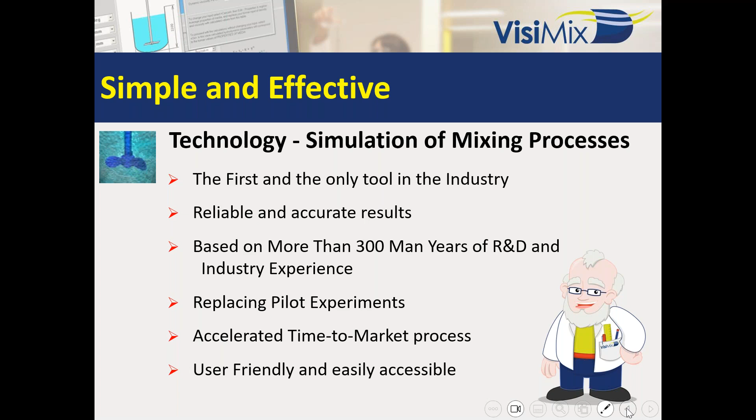After that, they came to Israel, and we transferred all of this knowledge into software, providing all over the world the capability to understand, in a very fast way, how we can provide what the process requires at different levels. So to summarize this part, this very fast introduction.

VisiMix is based on physical models supported by empirical data. We solve the momentum balance to know the velocity of the flow in a realistic way. We characterize every momentum component of the momentum balance equation, and we were able to consider experimental data and change the models and coefficients according to the specific geometry of the vessel.

We were able to provide not only the velocity of the flow, but also the gas holdup, the mass transfer coefficient, the drop size, and in other fields, the concentration of any material, or the solid distribution and more. So this is the brief summary.

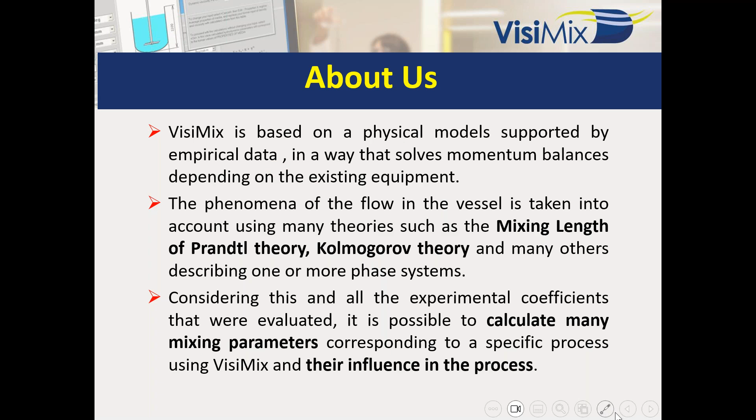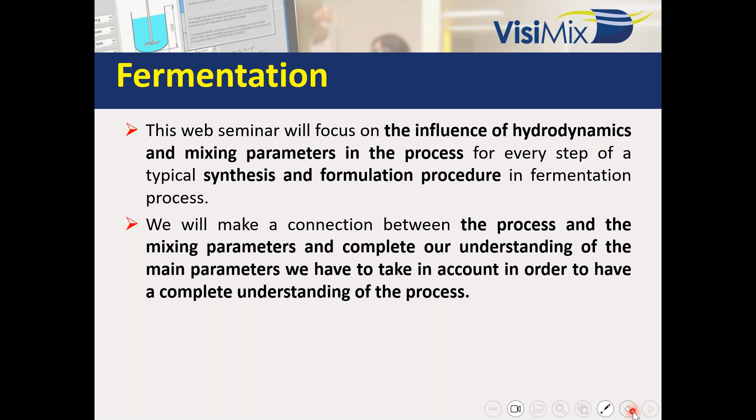So in the process description, and how fermentation connects with the process, we'll talk a few minutes about what fermentation is in the biotechnology industry, and how we are able to provide the conditions for this fermentation, coming from miscible liquid distribution, because we need to provide nutrients and pH in conditions where this microorganism will be able to grow.

We'll talk about, of course, the oxygen transfer from gas phase to liquid phase. This is the main point that we are normally asked about during our first connection with a biotechnology company. And we'll touch on some points that professional people are aware of: how the microorganism will reproduce itself in equipment that has shear rate, and maybe this shear rate can damage the microorganism.

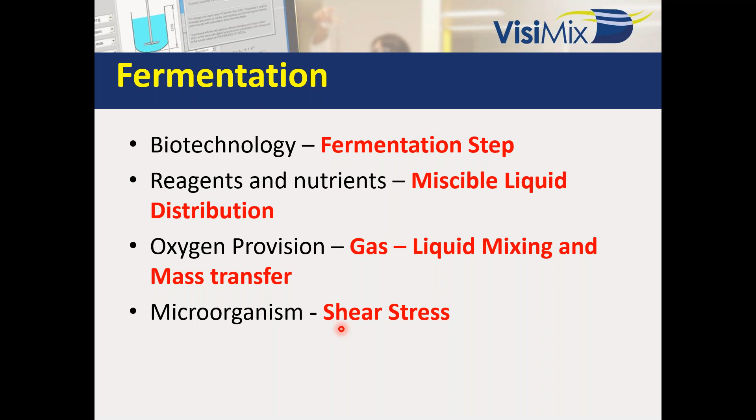We'll touch on it. Of course, this is more a biological question than shear rate. The shear rate, of course, we're able to calculate. We'll explain a little more about it. And of course, after that, we'll open the software and show you how it's working. So in biotechnology, the fermentation step is really the first step.

And after we finish this, we need to do other activities that, of course, the company business can support: how to recover the material, how to purify it, and how to generate our final results. We will discuss today the upstream. This is the normal name. Upstream is for the fermentation, downstream is for the harvest, purification, filtration, and maybe chromatography. So we can help on both. Now we'll focus ourselves on the fermentation.

Fermentation is a metabolic process that produces chemical change in organic substances through the action of enzymes. And in food production, it may more broadly refer to any process in which the activities of microorganisms bring about a desirable change to a foodstuff or beverage.

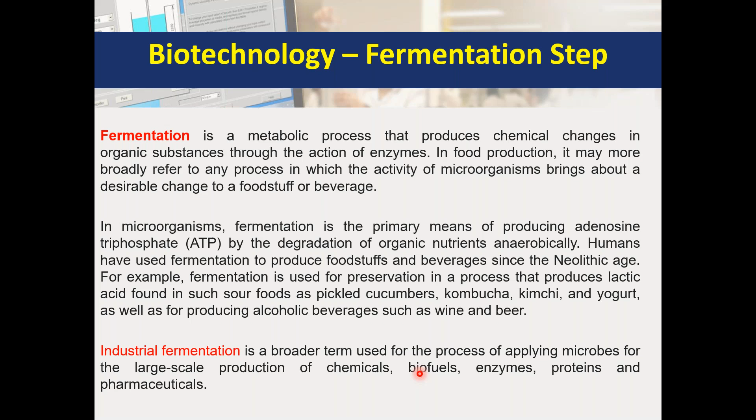So the first step is to understand what fermentation is, and in the industry, we need to organize all, and all the materials that we're using should be utilized well. As you know well, only to remind you, when we talk about microbial growth, we talk about nutrients; microbial cells will give cell growth, energy, and reaction products. This is what we're looking for.

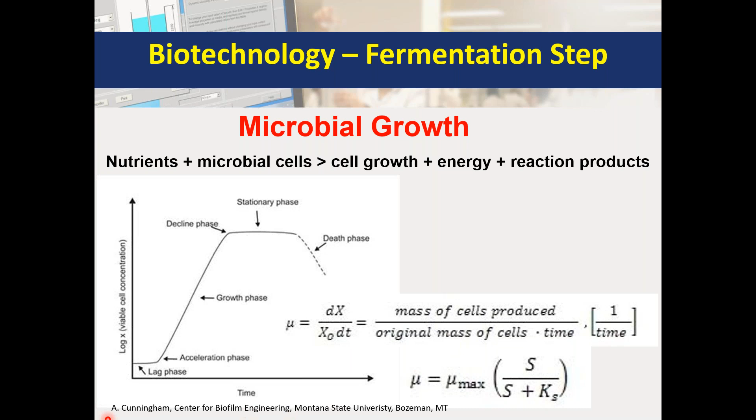Regarding reagents and nutrients, I want only to show you some very fast points. It is like we have a fast reaction. We need to distribute this material in the tank, and we need to be sure that during the growth of this quantity of cells in the tank, we're able to transfer material. I want to show you a very simple way how the material can be dispersed in the tank according to the consumption of this material.

And let's think that we are feeding some nutrient. In our case, let's say we have present there some group of salts. It's like the microorganism we have there, and I feed some liquid material. In this case, it will be HCl. If I'm spreading this material well, and the microorganisms are using this HCl, they will consume it well, and we will not see any change in color.

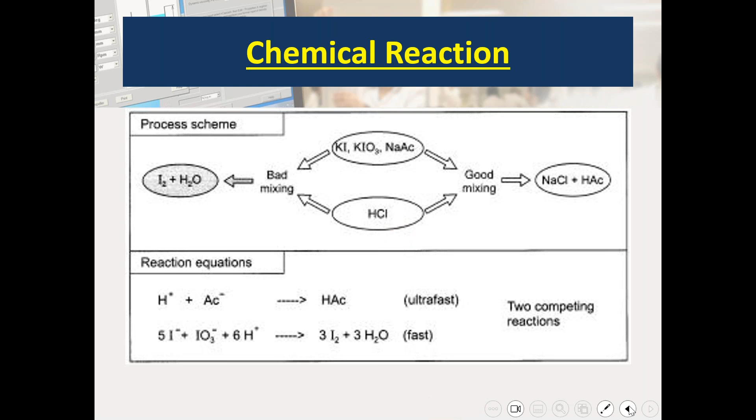But if we are feeding more than required or less than required, what will happen? We will have some deviation in the concentration in the tank. And we have more videos here; I will only present 2 main videos. What happens when we don't have mixing in our tank?

And you see what happens when we don't have mixing. The feeding at every place will be a localized one. Okay, you see it's local. This color is local, and we are not spreading this material well all the time. So cells that are in different places will not be able to enjoy this material.

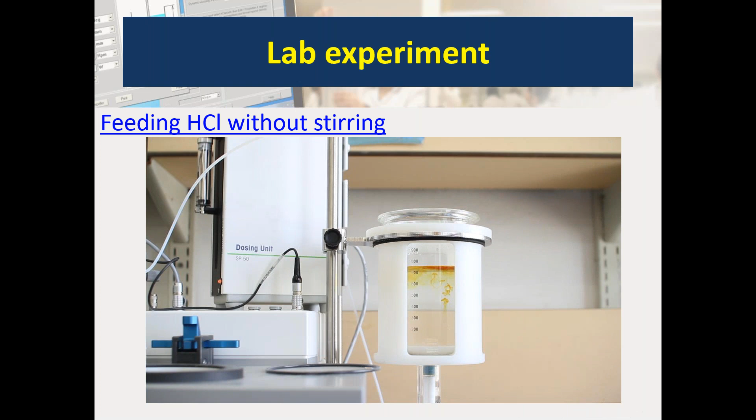If we change the conditions dramatically, and now we use a very fast feeding here in this pipe, fast feeding with high velocity, close to the impeller, close to the high velocity of the stirrer here, you will see that we will not have any color. And in between, anything can happen. For instance, in the middle of the way, we have some plume; close to the impeller at low velocity, we have some color, but it will be well distributed in the tank.

And all of this we need to take into consideration, because normally what we are doing is some tuning of the conditions in the tank by providing some glucose, some material for pH and more. And we need to take care about where we feed in order to spread the material in a good way and distribute it in all the tank. And we have 2 extremes.

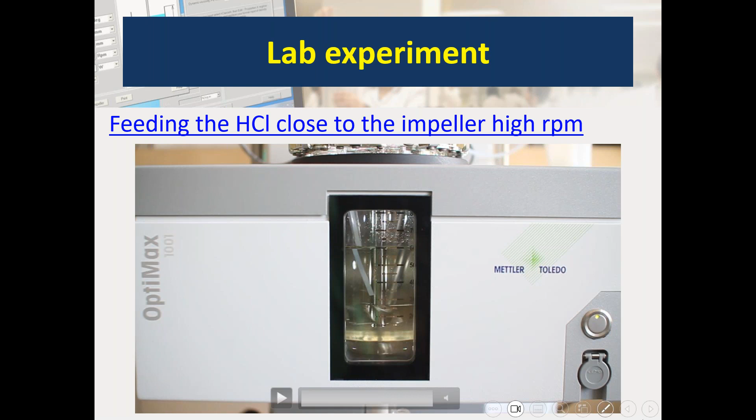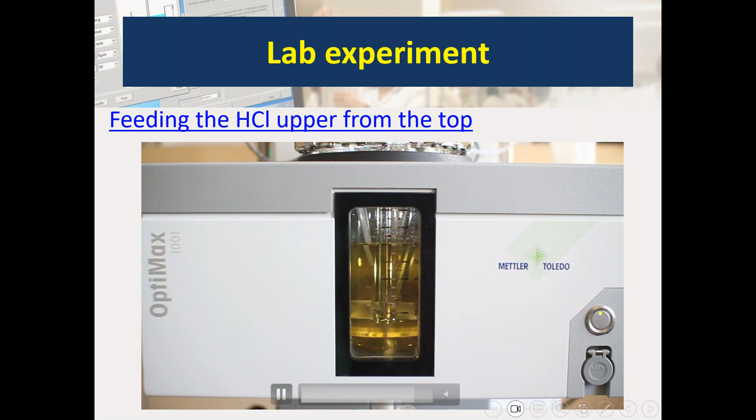And it happens in the tank that even if, for instance, I go to a low velocity, and from the top of the tank, you see here, what will happen is that around this point where we feed, in a few seconds, you will see a plume of material entering. It's happening now. You see some color entering inside. And it is a problem, because when we have this kind of situation, we are creating completely different conditions in the tank, and our microorganism will not feel the same in another place. So we need to take it into consideration.

Now we reach gas-liquid mixing and mass transfer. This is the main question that comes to our desk when we start to discuss with your kind of companies, biotechnology. And here we need to take into consideration that we are discussing a very typical mass transfer. The mass transfer of material in our case will be the oxygen. The oxygen mass transfer, KLA, that we are looking for happens because we have some driving force, that is the difference between the maximum concentration, the solubility of the oxygen in the liquid phase, the saturation, minus the concentration we have inside our tank.

As you can imagine, when we are growing the quantity of cells, the concentration in the liquid will go down because we have more material and we are transferring at the same rate. The meaning of this is we will require more oxygen in order for every one of the cells to be able to use this oxygen and grow. So we are talking about very simple mass transfer. We will be able to calculate the KLA. We're able to know what will be the maximum rate, this dC/dt, the maximum mass transfer to the liquid phase, and we will be able to connect it with the physical properties.

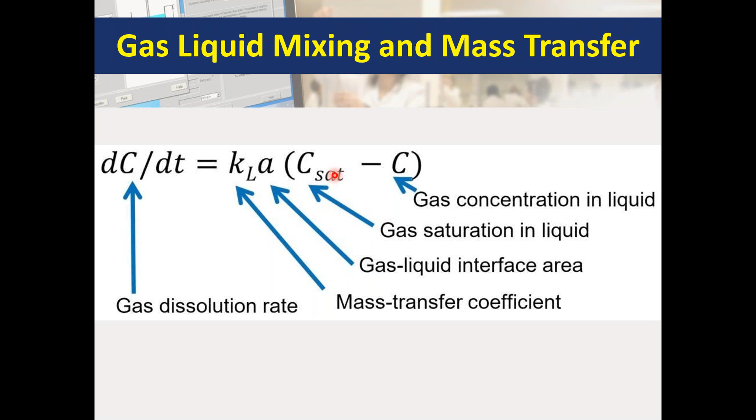So we are feeding some material. We need to transfer this oxygen from the headspace or from the bottom of the tank to the reactor, okay? And after that, we need to transfer this oxygen into the liquid phase. So this is the primary, this is the liquid phase, this is the gas phase, and the secondary is drops that may be the materials, the microorganism and more, or the nutrients that we feed inside.

We have three main distributions of gas. This one, A, is not well distributed, and more than not well distributed, some kind of flooding, the material entering and exiting. Okay, so we are not using the equipment in order to transfer the gas. We have some not good distribution, but in some way that we will be able to calculate for you. And we have a well and good distribution of material. We need to find a way to be in between these two stages and try not to be here, because if we are in the A situation, the meaning of this is that we're not able to do it. All of this the software will provide to you by notification, and after that by numbers and calculations.

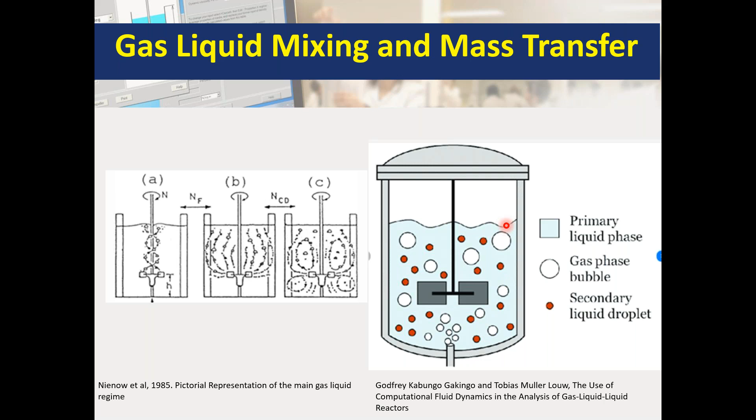For instance, the quantity of gas we will have in the liquid media, if you have some gaseous drinking, you will see the drops. So we'll be able to calculate the quantity of drops and the capability of the area that we're generating with these drops to transfer the gas to the liquid phase.

So this is the way it works. Once we have the drops, we're able to transfer the gas to the liquid phase, and we have some mechanism that happens here, taking into consideration that our drop maybe is going down. We have a distribution of drops, and we need to consider all of it in place and on average in order to progress.

So it is our gas drop and how it's transferring the concentration of the oxygen that we have in the middle of the gas to some film that happens inside the gas, going to the phase surface, and after that how this material is coming to a liquid phase and disappears or not according to the capability of the microorganism to get this oxygen and to progress.

These lines that are coming from the surface to the liquid phase and available to the microorganism can change dramatically in different parts of the process, and we need to be aware in order to adjust ourselves and to know what is the capability. Maybe we have more organisms than the oxygen we're providing, so we will come to the end of the capabilities to grow and start to die.

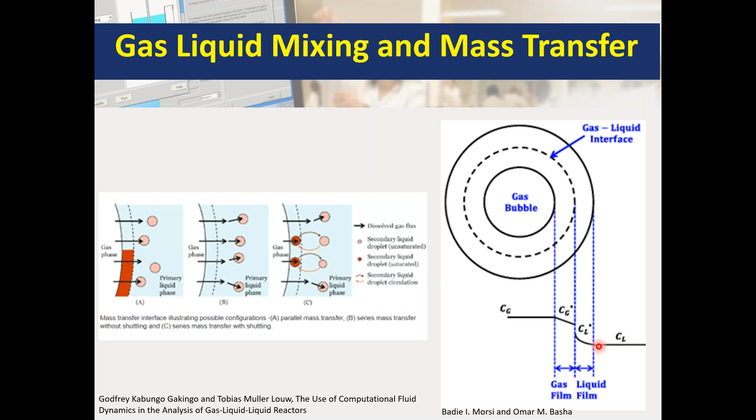So we need to have a way to understand what is the maximum, to take into consideration needs as part of the process. So this is what we explained before, in a big picture. You see the concentration of oxygen, some mass transfer to the wall, to the interface, and after that we're going down depending on the consumption of this oxygen, coming to some concentration in the liquid bulk, or in the liquid film it will go down to zero. The meaning of this, we have another way to take in advance. Okay, this is the point.

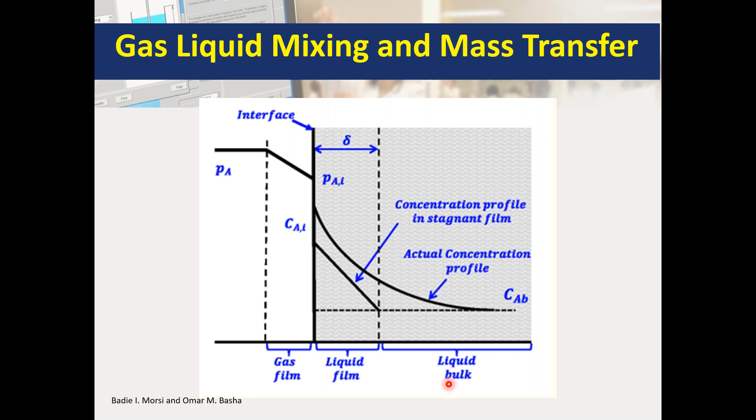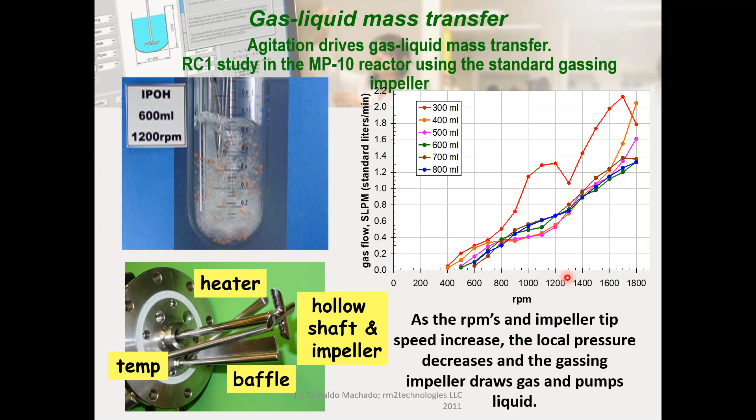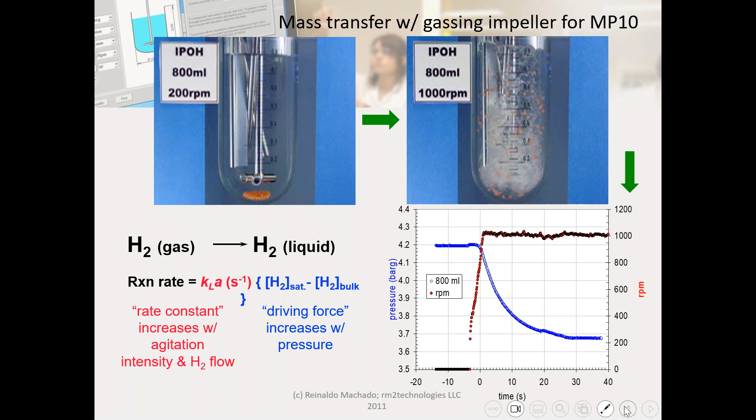This is the process. I invite you to enter the website. We have presentations. There is this presentation from Dr. Reinaldo Machado from RM2 Technologies, where he explained well how to characterize based on the measurement of the gas flow and the sensitivity to the RPM. He explained how we take into consideration, in this case hydrogen, but it can be oxygen, the measurements during the time, how we drop the pressure or consume with some sensor of dissolved oxygen in the tank, and how to calculate the KLA.

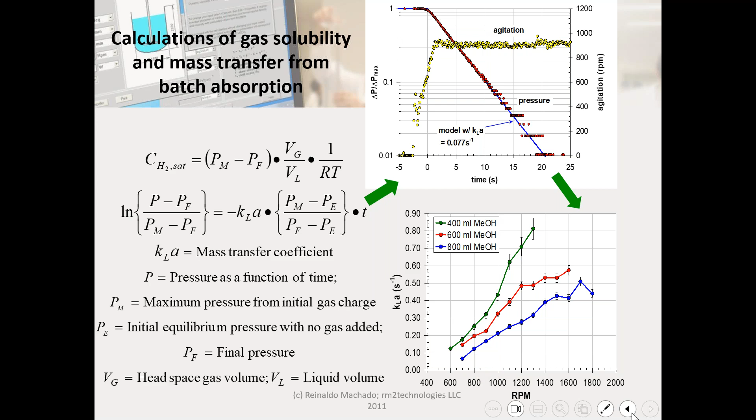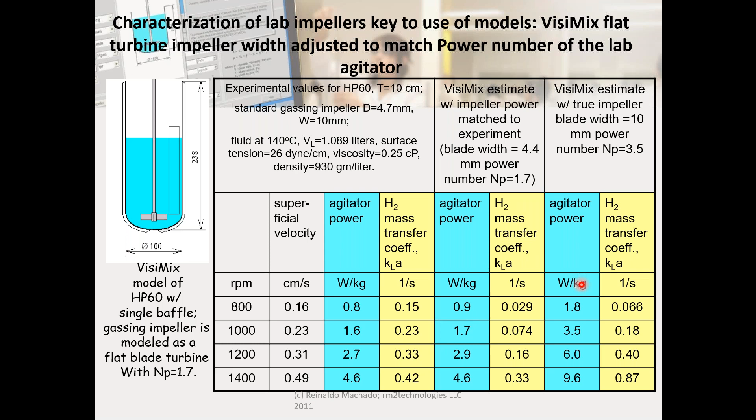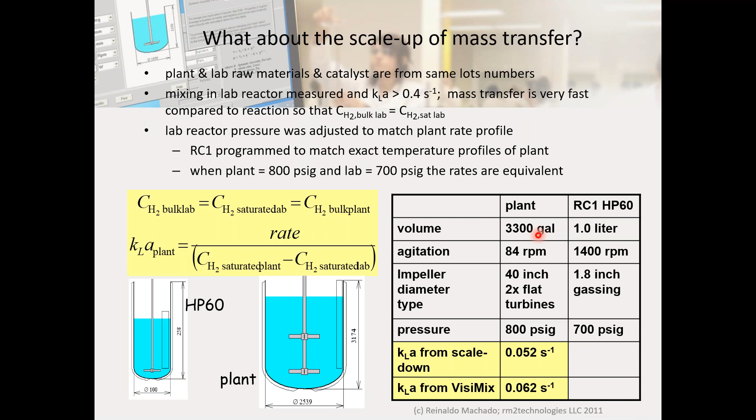It was done manually, and after that, we used the software in order to compare the experimental results with the VisiMix results, and based on it, because we have a very good model, we were able to progress and calculate the expected mass transfer coefficient in the next step. And to summarize, in this case they went to big equipment, from 1 liter to 3,300 gallons, with no problem. Okay, this is the main idea.

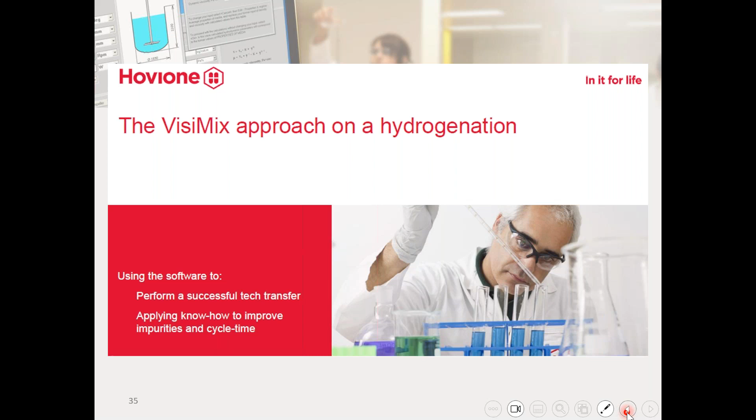Another interesting example, not from the point of view of characterization like Dr. Machado showed in his presentation, is a case study that came from the company Hovione, and they show us a different point of view. They were in the industry working in hydrogenation too, because these are mainly the histories we have that we can share. They show us how they went from this equipment to 6,000, and they did all the job exactly as we advise: go to the main important parameters, calculate the shear rate that is available, the drop size, and more.

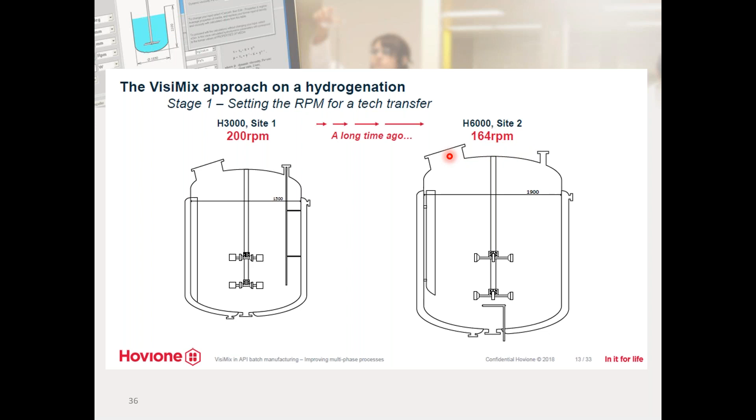And they wanted to reproduce, because they had another equipment in production, they continued to work and wanted to know what was the RPM. So they started with this equipment, H3000, at 200 RPM. They succeeded to go to the equipment H6000 with 164 RPM. A long time ago, with the software, they calculated the hydrodynamic parameters that are controlling the gas transfer. And after that, they continued to the equipment H5000, and they wanted to calculate the RPM.

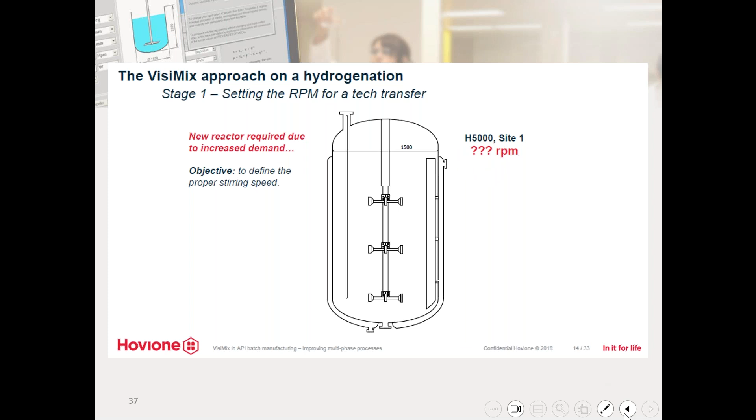The normal way to work, because they had data for it, is to understand that the energy of dissipation is a very important parameter to keep fixed in the gas-liquid media, because it is really generating the capability to diffuse the material to the liquid phase. And they found the conditions that will give them a similar maximum energy of dissipation, the parameter that is controlling the mass transfer from the gas to the liquid. So this solution works very well.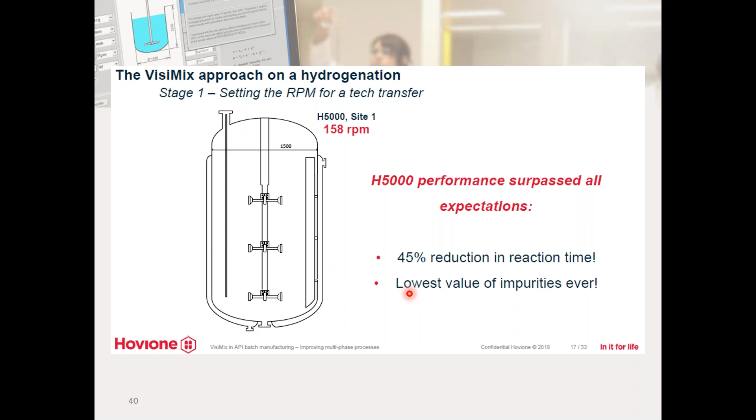But these people, who were very smart, wanted to know why. Because even if it's so good, it's not expected, and we need to solve it. We need to understand it. It's not expected, something we didn't take into consideration. So they did this job.

And when they calculated the parameters that for you will be very, very important, because we talk about microorganisms, the bubble size, the gas holdup, and the mass transfer area or coefficient, they found that it's completely different. You can see in the first two equipment we talk about very low numbers here. And when we went to the new equipment, we are very good. Here is the point. Now, why? The answer was very simple.

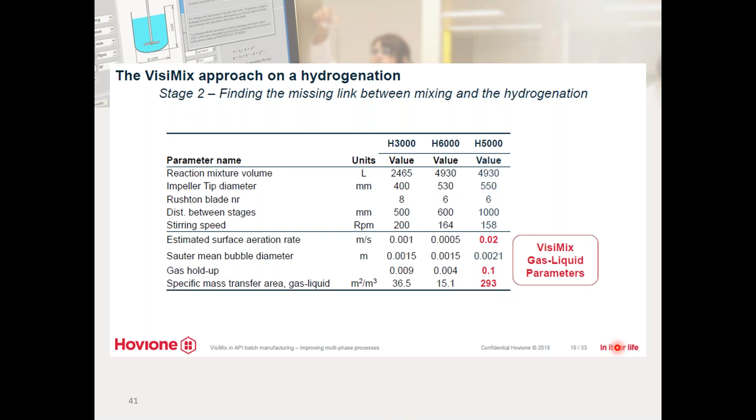Once you have another impeller, you are multiplying the steps that the gas will be inside the tank. And this gives a very high kLa, only using the third stage. It multiplies by 2 the capability to transfer the gas. So very important for your considerations. The gas transfer to the liquid will increase dramatically with some engineering. So I showed you the scientific point of view, and now the industrial point of view.

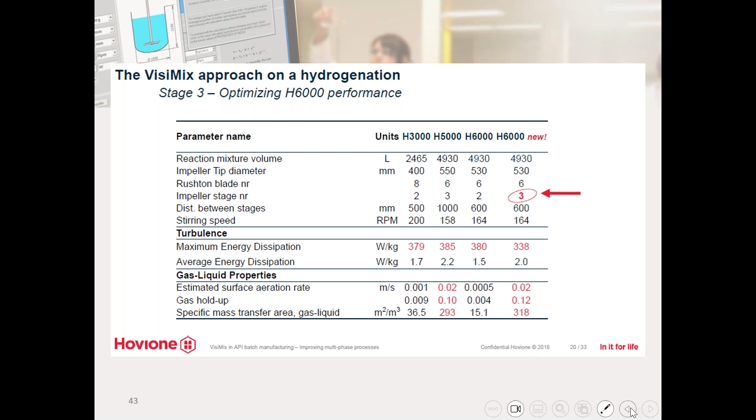And the final story is that they took the older equipment, H6000, added another impeller, and they got better results too. Okay, so this is the complete story from the point of view of the industry. Okay, very well. So the last point about microorganisms.

Here we need to discuss shear stress and shear rate, and the software is calculating it. I'm showing you the considerations we take in the models. The first is that in order to calculate the shear rate, we are taking into consideration the energy dissipation, those parameters I explained before, divided by the viscosity and density, with some power that is coming from the turbulence theories.

This shear rate, from the basic point of view, is coming from the fluctuation of the velocity. And here is the importance of working in the turbulent region. The turbulent region is generating this fluctuation from the average velocity, and it is the real reason that you have local deviations in our tank, and this gradient of velocity is generating a local shear rate. This parameter should not be confused with the average velocity gradient, and normally this parameter governs the mass transfer from the dissolution of solids and from the gas transfer.

And the point here is that this parameter is higher. You can see here, this parameter must not be confused with the average, and its value is typically 1 or 2 orders of magnitude greater than the latter. Okay, so the fluctuations of the velocities are the reason for generating this shear rate, which can damage the microorganism on one hand, but it's increasing dramatically the mass transfer capability.

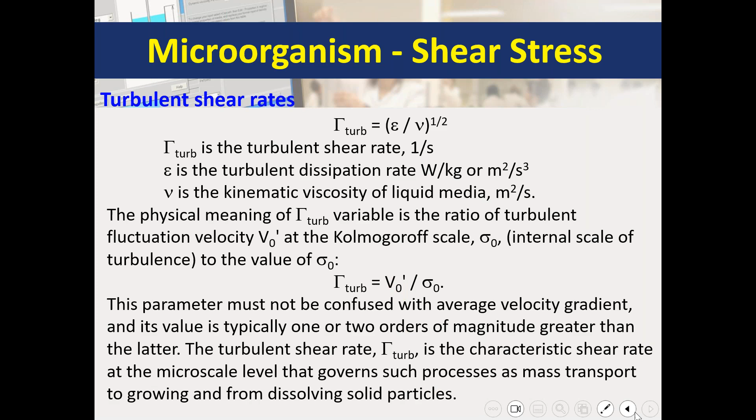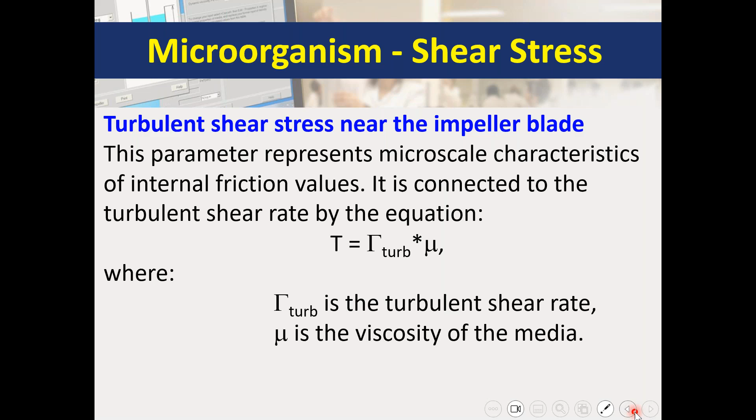So those parameters, I of course took this information from our guidance, and take them into consideration because this is an intensive parameter that you can use even in the lab, when you identify what is the shear rate that is damaging your microorganism. We of course will be able to have this number as a guide for the next step.

As you know well, more than me, we have different kinds of microorganisms that you can use. Some of them are reported to be sensitive to the shear rate. Some of them are less reported for the shear rate. The people working in equipment and mass transfer are less likely to know the mechanism of the process. We need to be aware, and if you tell us that this can be sensitive, we'll take care about the shear rate and not pass the critical shear rate that can damage the microorganism.

Okay, this is all the theory. The last point I want to remind you—because people that know us know this kind of thinking I am providing, explaining all the way—is to try to have some methodology to understand the process. The main idea is to consider that when we are working with our process...

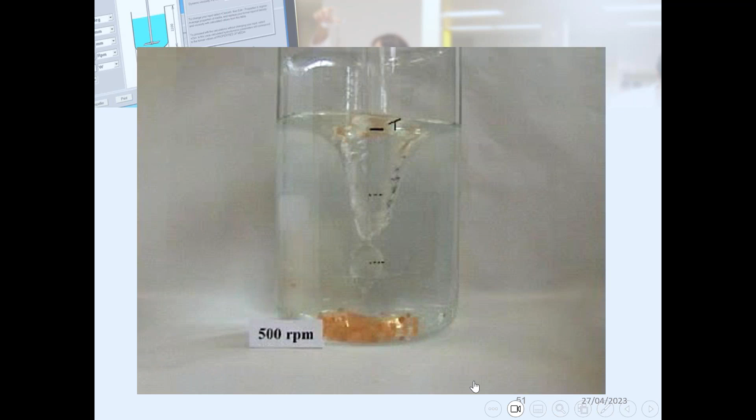We are doing some work in the lab, and we will be able to consider all the parameters I explained before, from a different point of view, in the production step, by using the software and calculating. Once you know what your real capabilities are in the production step or the next step, you will be able to set up equipment at small scale that will be similar in terms of the environment and the mixing you are generating for your process.

Because you bring the mixing from the plant or from the real situation, and you bring your process here at this stage, you are combining them between them, maybe for the first time, and you will be able to understand if the process will run well or not, and how to take care of deviations we will experience here.

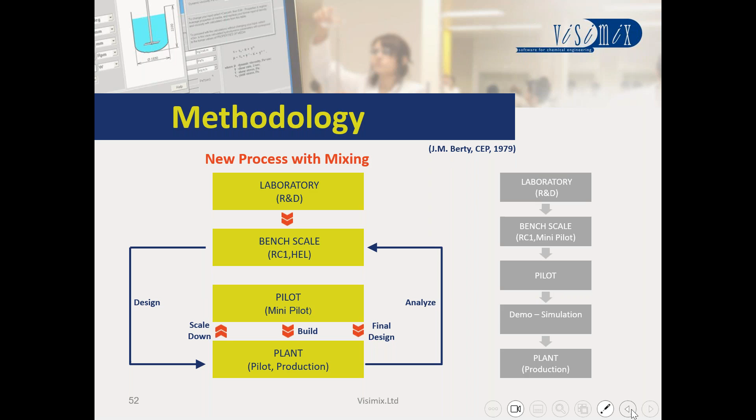When you finish doing it, you will have a final design, and you will have a model explaining how to progress with the software, and with the process. So we have a complete methodology that I will explain to you when you become part of our customer base. We have some publications about it.

In the gas-liquid system, the main important parameters we need to take into consideration are the circulation flow rate, the energy dissipation, the turbulence shear rate—all of which control the gas holdup, the mass transfer area, the drop size, and the mass transfer coefficient.

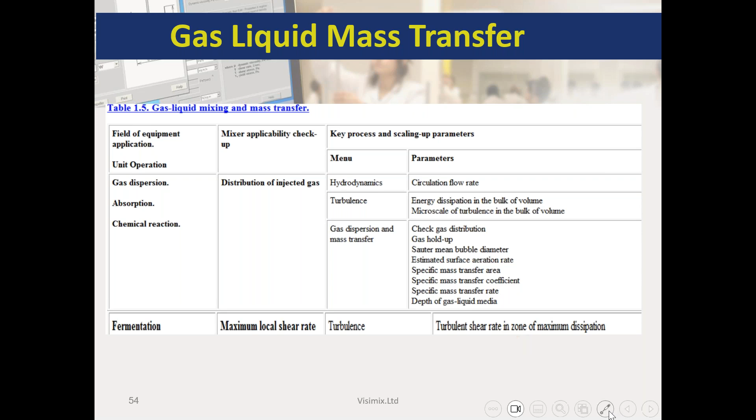This is exactly the way that we need to think. From here, we will open the software and show you how we are able to progress.

We have different products in the company. We'll share this presentation with you, and here you can see the main products that we have. Normally, you will work in turbulent flow.

If you are working in laminar flow, we're able to calculate the shear rate at every step and all, but the efficiency of the transfer will be a little more difficult. If you have more than one impeller on the same shaft, or an impeller that is off-center, we're able to calculate the same.

And if you want to use bubble columns, which can normally happen in this industry, we are able to calculate and to know for the case without an agitator in the tank.

We advise using scale-up, scale-down, and process evaluation to organize your data and guide yourselves on how to scale up while keeping the gas transfer coefficient fixed the same. This will all be inside the software.

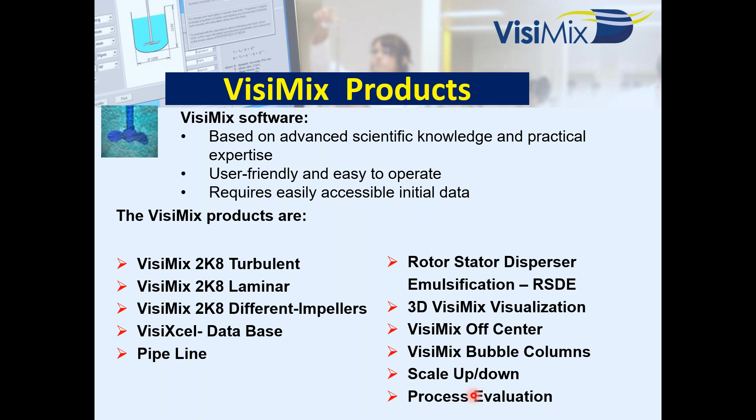At the bottom, you will select gas-liquid, and you will be able to figure out what happens at any other scale. If you have many options, you will be able to put them on one page and think about your technology transfer. All the explanation about the products we have—turbulent, laminar, and more—is there. So take care of it.

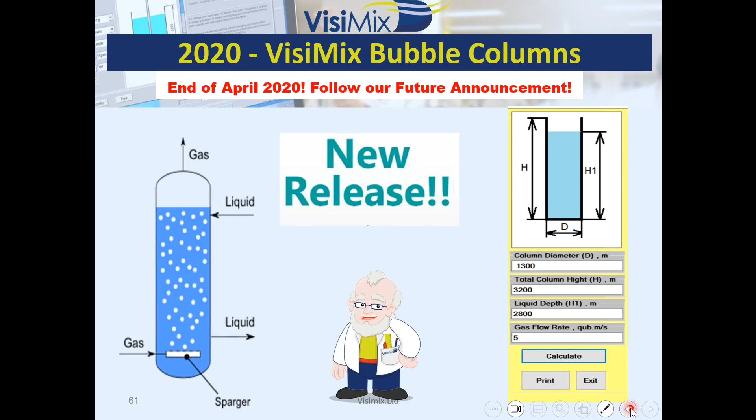You can read more, and of course, you are invited to come to our website, where you will find more information.

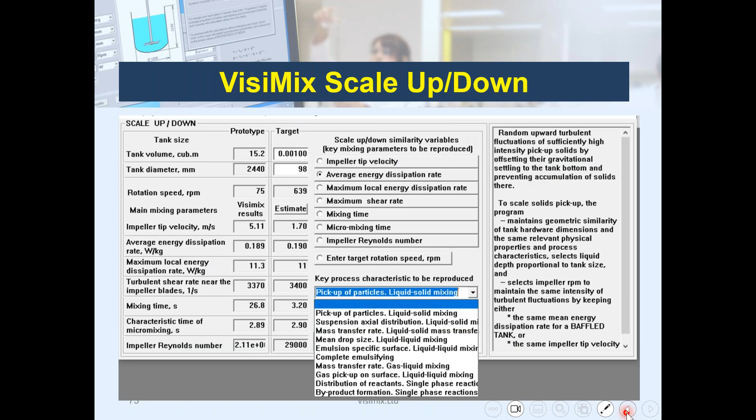I want to finalize the presentation before I start showing you the operation of the software—come to the software and come to the website and see the models and verification examples. Some of our customers share their experience and testimonials.

But I want to emphasize that we're talking about a complete model of mixing in the stirred vessel. It's not only a theoretical solution of mathematical equations, nor is it only some correlations that are normally limited. It's a really deep, experimental study about friction factors that are characterized in different kinds of flow in the tank.

for different equipment. We modify the fluid mixing models in order to include this knowledge into the general momentum equation, to characterize each one of them, and to generate the velocity that will be the base for calculating other parameters. So we're talking about a complete model, not something purely theoretical or purely empirical. This is our added value to the market.

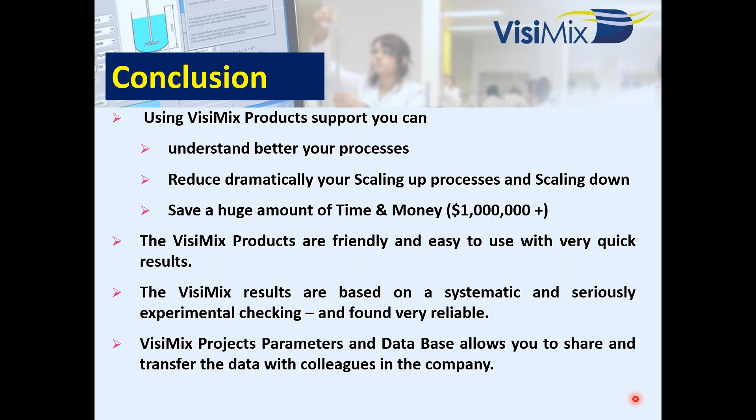Okay, based on this, I will open the software and show you how we are able to calculate all the steps—how we are able to introduce the gas into the liquid media, how we're able to know the drop size, and how we're able to transfer this into the liquid media to transfer oxygen or other material that is miscible or consumed there, and show what the capabilities are in the lab and in the production step.

We have many questions. I will advise to answer you during the meeting. After that, I will cover these questions. Okay, let's progress.

Let's progress now. I will open the software. Software is turbulent, and I will click project new. This is the first step, and I give a name that will be lab fermentation, okay?

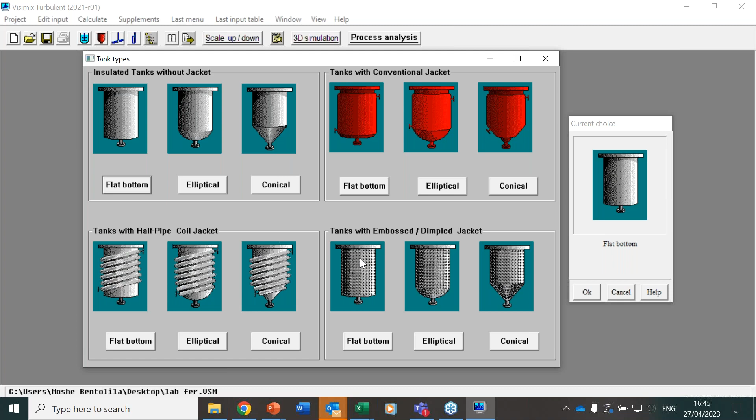And when we click save, the software asks me what is your tank. I will use a typical tank in the lab, it's like this. I will not use heat transfer in this stage because normally it's not the main important operation that will change results.

And when we click OK, the software asks me about the diameter. Let's say that we have a 1 liter equipment, okay, and I'm using about 800 milliliter in my tank. So it's like this. When we click OK, the software asks me about baffles.

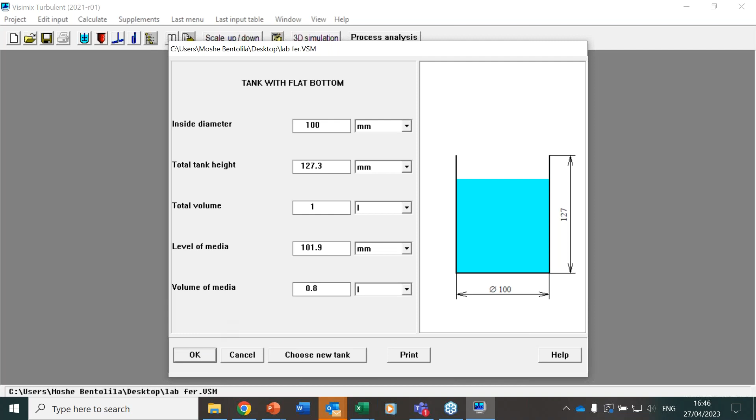Normally in your small fermenter, typical 1 liter equipment that is very available and common in the market, you have baffles like this. You have more sensors, but the baffles are enough because you have 4 normally, and this is fully baffled equipment. And the width of this is normally 10.

The length, if I click big number, will be the maximum one. You have some distance from the bottom. Normally you have very small distance from the bottom. The distance from the wall will be 5, and the angle is 0. So you have like this, 4. This is a typical fermenter you have in the lab.

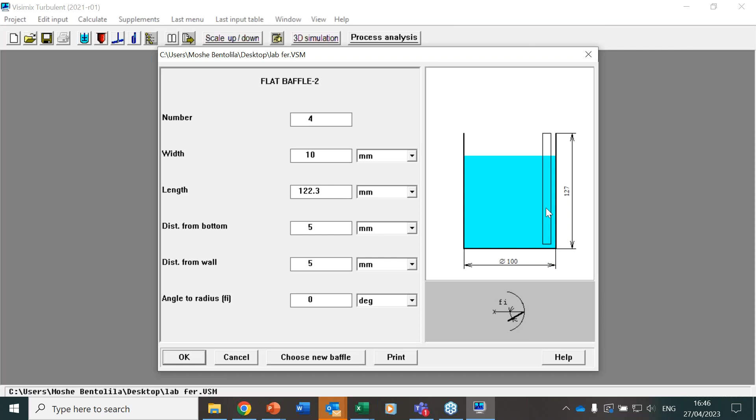And when you click OK, normally you are using this turbine, and normally in the lab you have 2 stages, so I will use multi-stage. I will require to have 2. The diameter of this tank normally is about 60, 50, 60, depending. The distance between stages will be, let's say, 50.

The diameter of the disc will be 45, and we have normally 6 blades, 90 degrees. The width of the blade will be 12, and 12 the length. Sometimes 10 and 10 it will be okay.

The distance from the bottom, the minimum will give me 0, the maximum will be more. This is very big, maybe I will go to 50, okay? With your permission, you see how fast we can change.

And after that, normally you are working about 700, 800, and it is okay. It's good because we have small equipment. We need to provide enough intensity to progress. And maybe the distance from the bottom will be 20, okay, instead of 15. Okay, you see how fast we can change.

And the motor power is not so important here in the lab. In production it will be very important because we need to protect our motor. We don't use this parameter in order to calculate nothing. We only use this parameter in order to compare to the mixing power we are calculating and to be sure that your motor will be enough to progress.

So we click OK. Now we need the density and the viscosity of the material we have there. I will use water, but I know that you have some deviation from water. It will be okay, this deviation is 10%, 15%. All of this is entering the software with no problem. And I will use Newtonian.

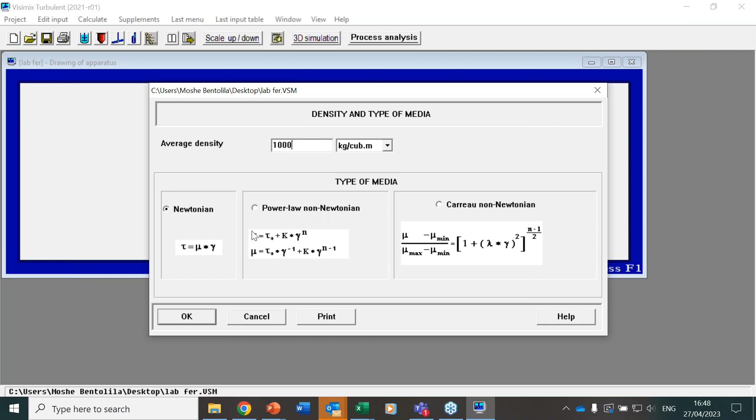If you have a situation that you have non-Newtonian media, you will need to provide a little more data. But in Newtonian media, the point is to provide the viscosity. So I will use 1. Let's say I will use 3 because you have more components there. It's okay, we can have more or less, we are able to calculate it.

Once we click OK, we are ready to start to calculate. What can we calculate? We can calculate many parameters. You can see all the hydrodynamics, all the turbulence, all the mixing times, and of course, if you feed some material, what will be the blending and the concentration of the material in the tank, as explained before about the color there.

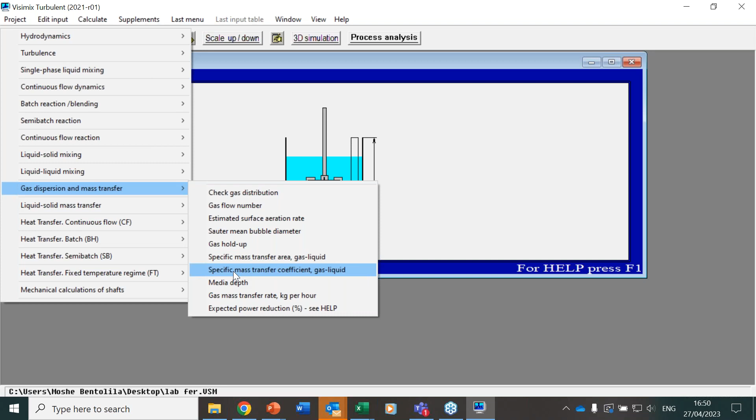And if you have some solids, we're able to calculate the solid distribution, or some liquids for emulsification. It is not here, but it can happen maybe in the downstream. And we can calculate here, as you can see, the estimated aeration from the top or from the bottom, the diameter of the bubble, the gas holdup, how much gas we have in the liquid phase, and how much of this liquid phase, the material that we consume or dissolve in the liquid phase, we'll be able to calculate the KLA, and what would be the transfer rate. And we have more about heat transfer that is not relevant for here.

Okay, so let's just show you how fast we can calculate mixing parameters that are important for you. For instance, the shear rate that we discussed before, around the impeller is this number, near the baffle is this number, and in the bulk is this number. Take care about it.

These numbers will be very important to keep fixed. After that, if we know the sensitivity of this number in your media and your microorganism, you just click get solution.

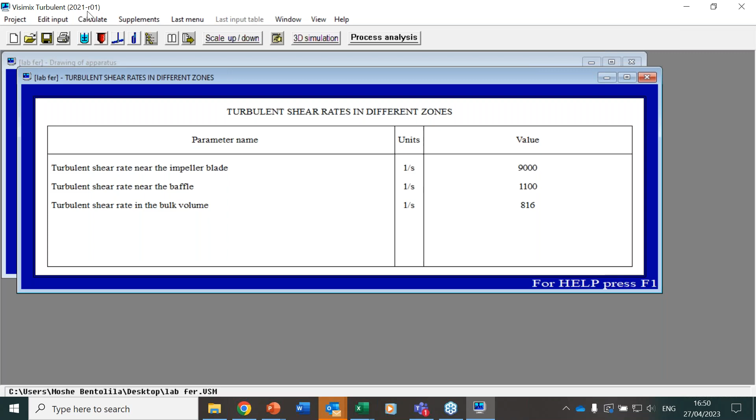If you want to know what will be the circulation flow rate, you can see immediately here the circulation flow rate, what is the cubic meters per second, or how long it takes for one round of all the volume to pass through the equipment. It is very fast in this case, very small equipment.

This number can be very important when we are talking about big equipment where the time is longer, and if our material is not so stable and tends to react, maybe we have some impurities that we don't want in the process - it's depending on the process.

What I will focus on is feeding the data for the gas. So I will click here in the gas mass transfer rate, and the software will ask me all the data required for the gas calculation. Of course, if I only click the diameter, we will require less data. But for our case, we will need also the gas mass transfer, and the software will start to ask me all the data.

The first is the diffusivity. If you know the molecular diffusivity, good. If not, you click 0, and by the molecular weight of the solvent and the gas and the temperature, internal models we have inside are able to calculate it. The molecular diffusivity is very known and simple to find.

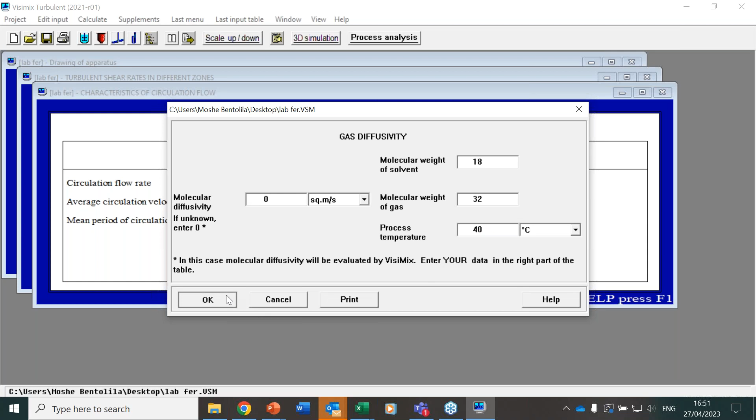Now this is very important - the gas solubility. We need to know the gas solubility because it is the driving force we use in order to transfer our mass from the gas to the liquid.

The order of magnitude of the solubility of gas, oxygen, is around 1 kg per cubic meter. And for the concentration, if we click, for instance, 0.2, I will know what the gas rate will be under this concentration, when the concentration of the gas in the liquid phase is 0.2.

If I want to know the maximum capability of my equipment to transfer, we click 0 here, and this is the maximum. More than this, we will not be able to transfer. It's a very important number because this will be the maximum you will be able to achieve - more than this, the process will not be so effective.

You feel it when you have a high rate of growth - you need to provide more oxygen, you need to increase the velocity, but there is a point where it's not possible to do more. So take care, because if you are expecting to have more, you will very fast go to the stationary stage and then to the death state, which nobody wants.

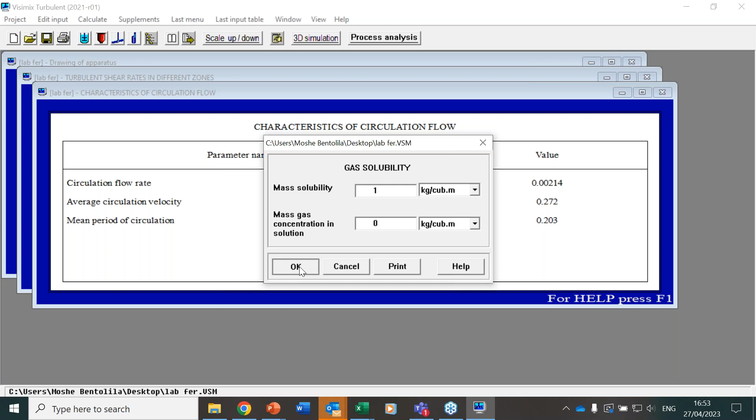So we click OK, and now we need the flow rate we enter. If you click here, a big number will be the maximum one, and if you go beyond this, it will be flooding.

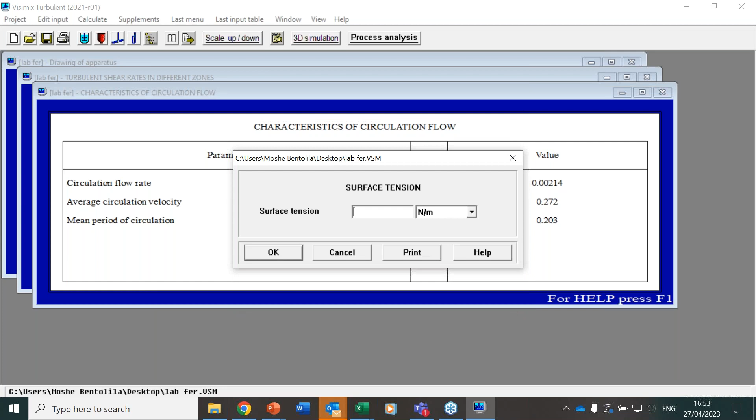So I will use, for instance, let's say 1.4 - this is the middle of the way for this equipment. And when you click OK, we need the surface tension because we're generating some drops. So let's say I will use 0.07.

Once you click OK, you see - oh, significant non-uniformity of gas spectrum, so we are not using all of it all the time. And when you click OK, the software gives me the kilogram per hour maximum capability of my tank.

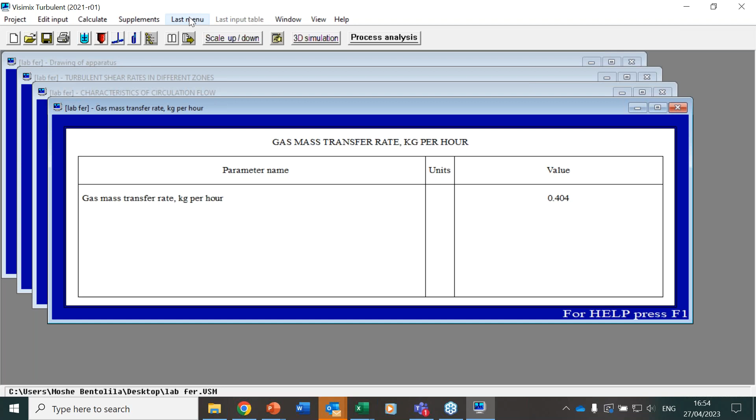But we can calculate more, so let's do it from the beginning. We know the diameter of the bubble, you see it's about 4.33 millimeter, and we have the gas holdup, it's about 25%, which is very high here - very good in this equipment. We can calculate the mass transfer coefficient, 0.14 - not so high, not so low, it's in the middle of the way. As you see, all the parameters are ready to use with no problem.

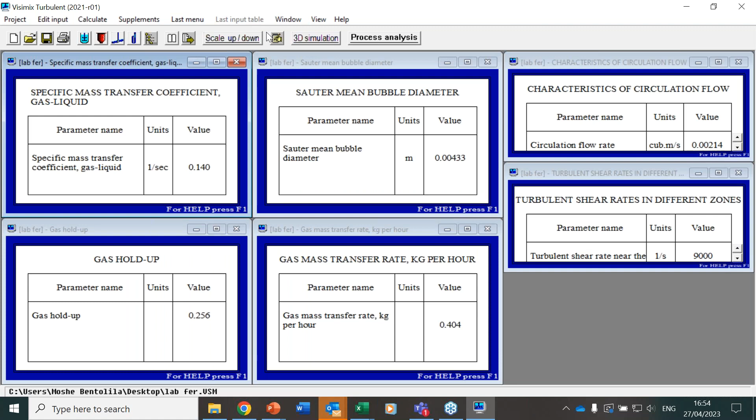Now, let's say I want to see all of them. I want to go to scale up. Let's say I'm happy with this and I want to reproduce exactly the same in a big equipment.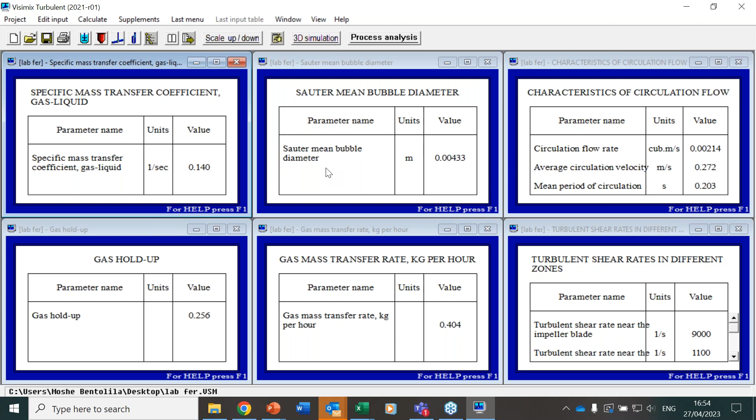The guideline for you, if you are in the industry, and maybe you are not so familiar with many important mixing parameters that are controlling the process, this button will be very helpful. Because in this button, you are bringing the data from the 1 liter. You can ask, okay, I have 6,000 liter equipment; by geometric similarity, we will calculate the order of magnitude of the diameter that you will find in the big scale.

And if you ask the software to have the same mass transfer rate in the gas-liquid, the software will tell you exactly what velocity you need to apply in this big equipment and which parameter is controlling this specific mass transfer. In our case, it's the energy dissipation rate. So you see the energy dissipation rate is similar, and the other parameters will be a little different. Take care about it. For instance, this mixing tank can generate impurities. If your material will have another reaction happening there, you are taking one order of magnitude more,

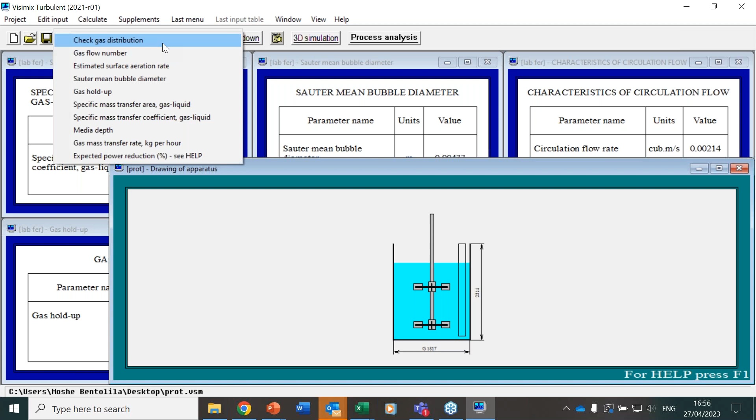so take care of it. Once we click OK, the software is providing the best prototype, and when we click Save, we now have our big equipment, exactly the same geometry, and we can calculate, for instance, the mass transfer coefficient for 230 cube per hour. You see this is exactly the same or very, very similar.

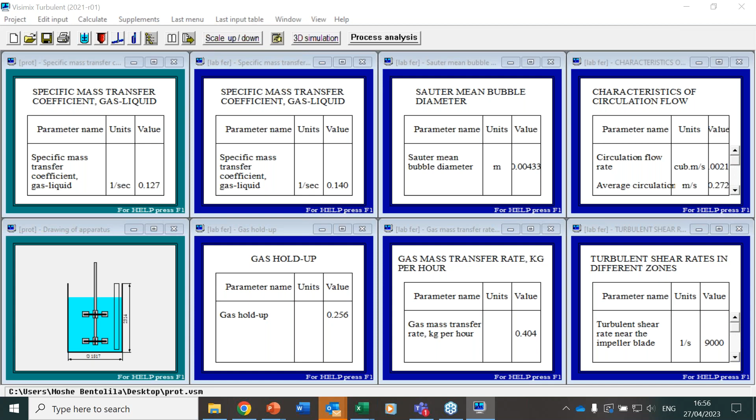Now, you can tell me, okay, but my equipment is not exactly the same geometry. Of course, it's the best prototype. Let's now make a model approximate to my real life. So you click clone, you have option number 1, and let's change, for instance, the tank. The tank will be 2,000 instead of 1,800. And you want to use 5,300 liters, okay? And you have 4 baffles like this, and you have this turbine.

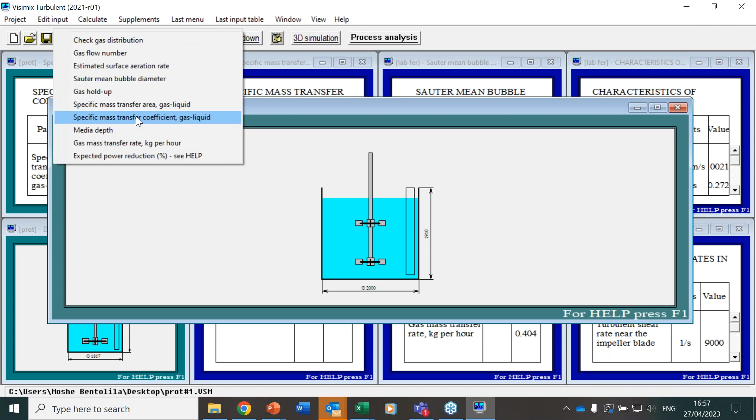The diameter will be 650, and here will be 125 and 150. The distance between them will be, let's say, 800. So the distance, sorry, not the diameter, 450. Sorry, this is my mistake. The distance between the equipment will be 800. Okay, like this. And when we click OK, this is my real life, and we can calculate directly what happens with the mass transfer coefficient when we have the same 230 I did before.

And once we click OK, you see that, oh, in this case, it's not so good. And now you can compare between them, and you can run and change what I did before. For instance, my velocity was 100. I can go to 150 because I think I have enough power for it. And now changing it, oh, now it's 0.07 or 0.3.

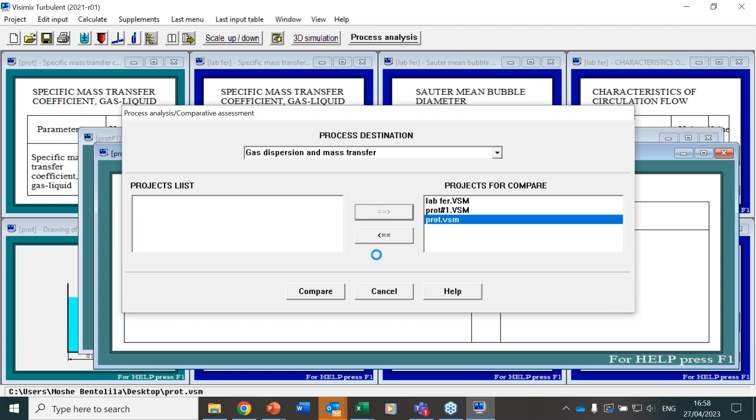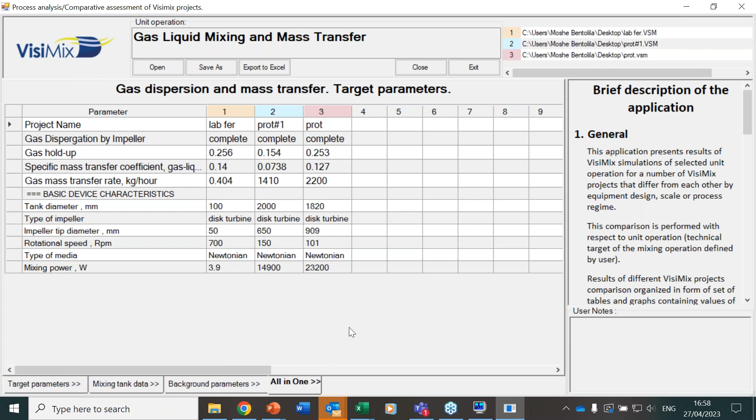And if you want to compare between them, you click process analysis, and you bring the gas dispersion and mass transfer, and the software will provide to you in one table all the realistic results regarding the gas holdup, the mass transfer, the rate. And you can see the difference between them. We can provide not only the gas, it's the same for all the parameters, and here some other parameters that we know can influence your results. All of this you can export to Excel.

So this is what I wanted to show to you. We are exactly at our time. I will only cover some questions we have here.

Why was energy dissipation used as the scale-up parameter rather than P divided by V or KLA or other? The answer is simple. Energy dissipation is a fundamental mixing parameter, and it's power per volume but distributed in the tank. And sometimes the average will be the same for different kinds of equipment, even if the equipment is more shear than pumping. And the shear in this case is very important. So this is the reason that we talk about mixing parameters.

And after that, of course, if you calculate the KLA, it is a consequence of the power per volume, energy dissipation, or shear rate. The KLA is a function of it. So in this way, you can connect between them. But the guideline is for when we have not enough knowledge. We don't know all the parameters we need in order to calculate the KLA. You can be guided by the pure hydrodynamic parameters, energy dissipation, shear rate, circulation flow, all of them you can use, as I will show in the presentation.